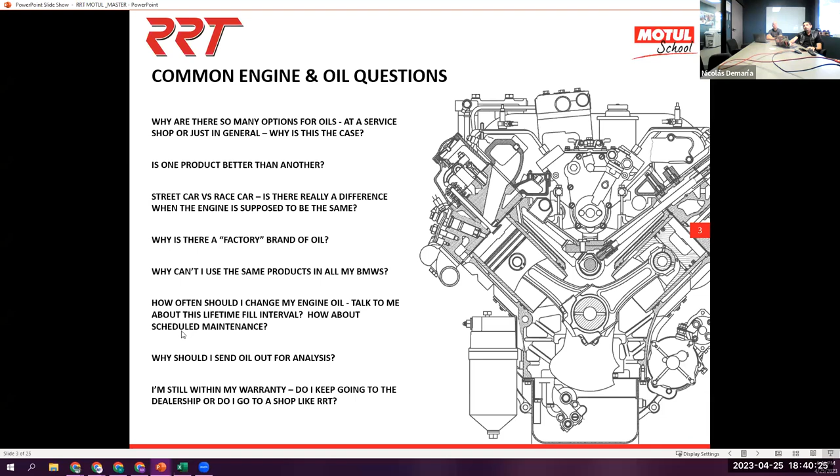First of all, we wanted to make a brief introduction about the Motul brand for folks that don't know about us. It may seem crazy, but it's one of the oldest standing brands in the world, started in 1853, and in the 1950s became a French-owned company. We are still a family-owned, independent company. We focus on blending lubricants and other maintenance chemistry, with no relationship to the fuel world. All we think about is lubrication and maintenance solutions.

Sometimes people ask us, hey, what's special about Motul? What did you guys do along your career that makes it so special? We do have some technical milestones that I could mention.

On the left you can see that we were the first ones to trade a multi-grade lubricant in the market for regular automotive applications, which was previously limited to aero and some defense applications. We were the first ones out there in 1966 to commercialize a semi-synthetic lubricant for cars. And one of the things we take most pride in is being the first company to develop a 100% synthetic ester-based lubricant for normal car and motorcycle applications, back in 1971. That was the birth of 300V, because back then we had 300 victories with the Motul-supported teams. Ever since then, everything to do with racing and engine oils for Motul has been 300V.

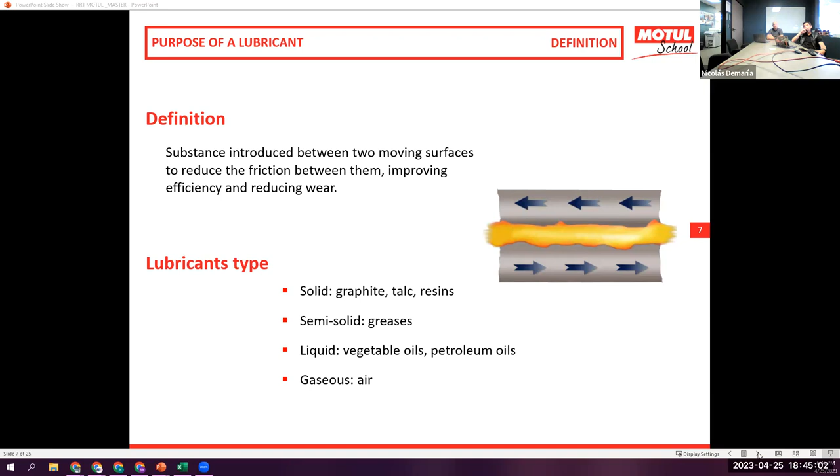We will see a brief overview of the different functions that an engine oil needs to perform inside the engine, some of which are becoming more and more important in recent years. First and foremost, reducing friction, minimizing mechanical losses and wear, and providing a film that's stable and consistent across the board, no matter the load state of the engine.

Mechanical losses are super important for us. This is how we make money with racing. Approximately 30% of what you put as fuel inside your car goes to waste in friction. That 30% of losses is divided among the many different components of the engine, especially the valve train, the piston cylinder interface, and the crankshaft. So the additives inside the oil, and the base oils we use for certain applications, are all targeting reducing that friction across those different components.

It's obvious for all of us that by lubricating and providing a stable film, we provide engine noise mitigation. We can't have parts slapping against each other with no control, especially in high-revving engines.

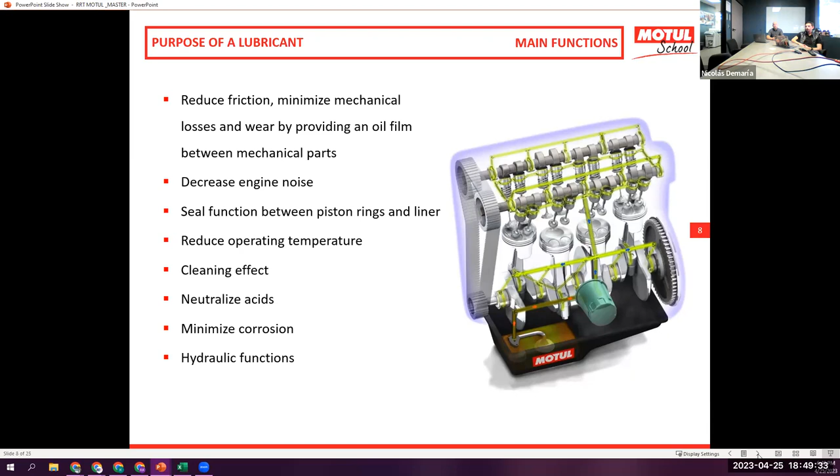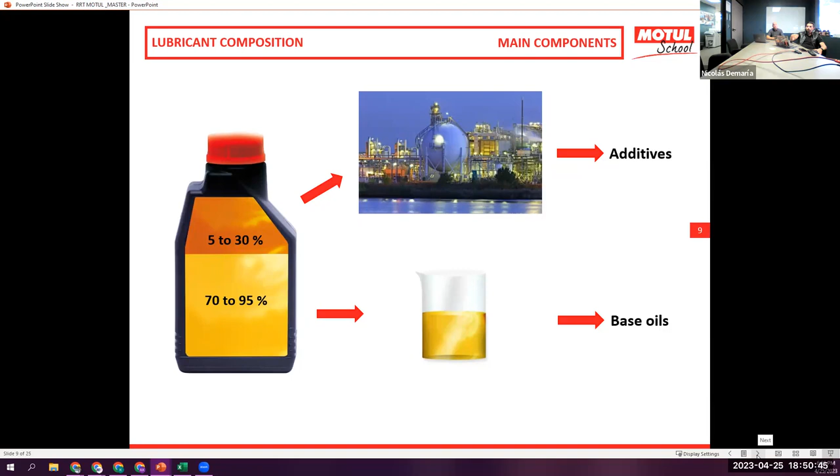As a rule of thumb, one can always say that simple hydraulics, as you would have in a hydraulic press or anything of that sort, don't carry that much additives. It's pretty much 95% base oil. But when it comes to more complex fluids, like certain engine oils, power sports engine oils, transmission fluids, then the additives weight in the formulation becomes higher and higher. The more complex the functions, the more additives we need to put into play for giving the oil certain specific characteristics, avoiding the oil to degrade, making the oil flow better, etc.

This is a brief overview of what you can see in our line and how we represent the different base oils and how we convey to the customer what application those oils have. So from left to right, you see the level of quality going up from the mineral products, which we barely carry in the States—there's hardly any demand for us in that market. But you can see the technosynthese line, which is a specific blending of mineral and synthetic oils, or sometimes of only synthetic oils. And you have your fully synthetics there, the 8100 products, which, depending on the naming, you can see an example from the X-cess.

We tell the customer what approvals these products meet. And obviously, as you can see on that 8100 X-cess, the higher we go in terms of quality, the more approvals the products carry. So the more multi-brand approved those oils become.

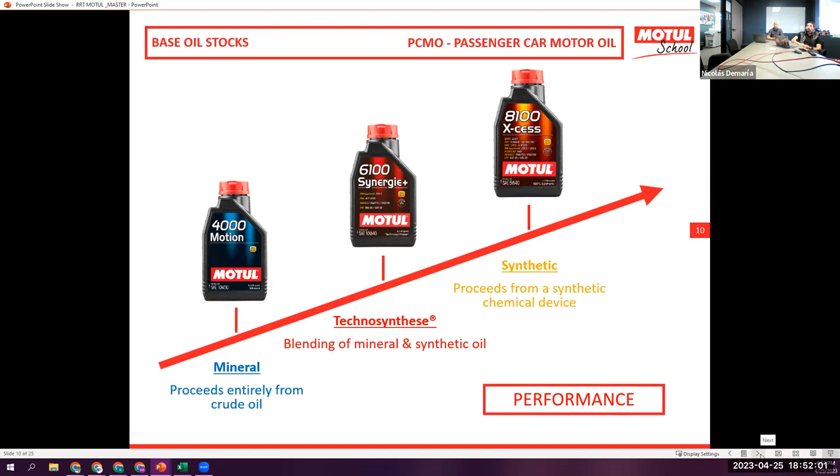Sometimes we cannot mix that many different profiles, but it's okay, Kelsey. That was the right picture. Thank you very much. We're very synced on timing.

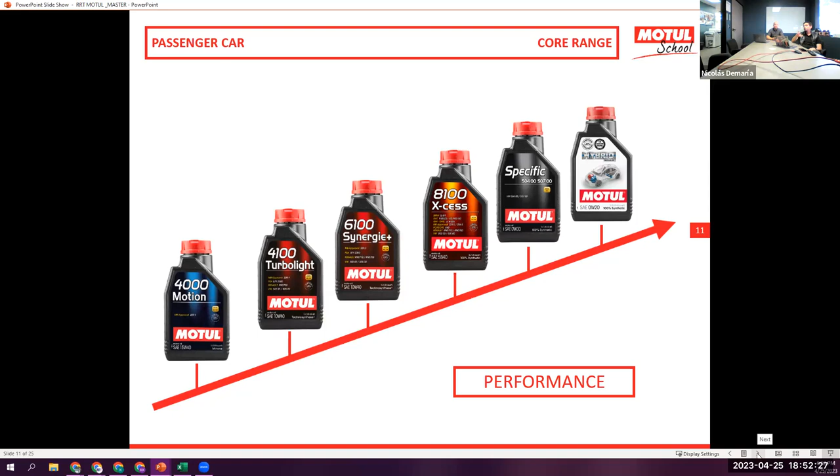Sometimes we cannot mix certain applications, or we have specific demands from certain customers, like big buying groups, certain dealer groups, and you will see some specifics. There's an example there from an Audi, Volkswagen type of product, but you will see afterwards that there are plenty of specifics for BMW as well.

Also very important, because we like to provide tools of the trade for every type of customer. We saw that there are plenty of Motul applications for service cars, but we also provide a broader range of viscosities and product profiles for racing as well.

Like I said a couple minutes ago, 300V is everything that has to do with racing in the Motul motor oil world. You see three very brief examples there, a 540, a 1550, and a 1060, but there are 12 different 300V products. The idea behind that is to give customers a viscosity that will match every single tune or prep type of architecture or calibration.

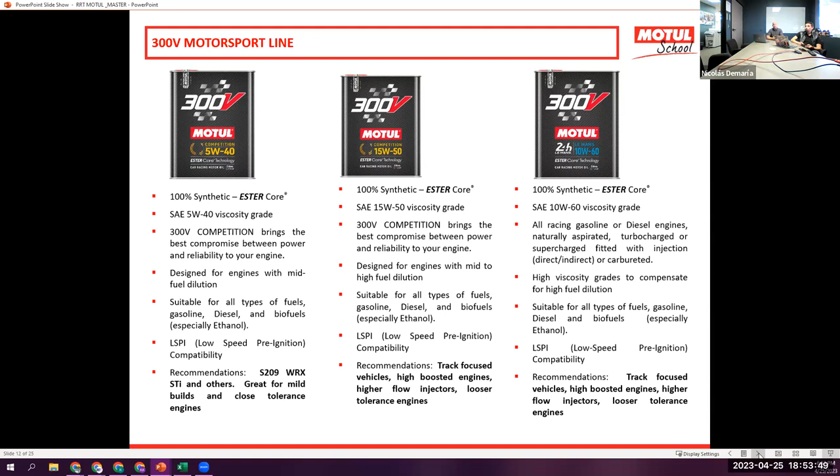So you can go from very, very low viscosity fluids, such as a 0W8, very aggressive, drawn towards qualifying or very, very short stretches of racing, up to a Motul 300V Le Mans 20W60, which is one of the most used products for endurance. The idea behind this is meeting every single tuner need.

Now, why are synthetics so good, and what makes the 300V a different type of animal? First and foremost, we need better thermal stability that will provide better oxidative stability. When I mean oxidation, I'm referring to the oil's degradation by high temperature and by certain contaminants. Synthetics are very, very superior in that respect versus regular minerals.

Also, when we're talking about high performance applications, we need to consider the better stability this chemistry has, providing a more stable film, fundamental when it comes to high revving engines, engines that are operating at high temperatures and sometimes with a lot of fuel dilution. You need that viscosity to remain constant.

Synthetics will obviously flow better as well at low temperatures, but when it comes to very harsh environments, when it comes to engines running sometimes at 1 degree Celsius in the morning, and along a stretch of race on a rally, they will hit 30, 34 Celsius during the day. You need to have that broader range of temperatures available from your oil.

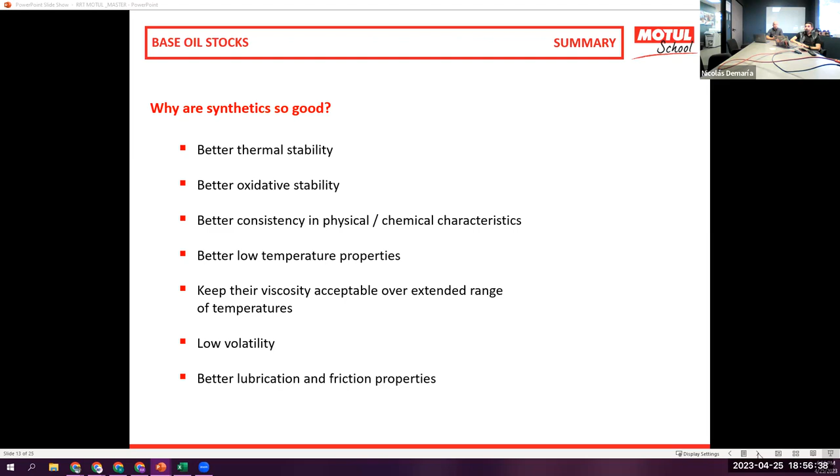Matt, I just seen your question regarding E10. Absolutely, these fluids have been tested with E85, E100, and in some markets with M85, which is 85% methanol. It's not very popular here, but just so you know, all of these 300V products are all biofuel compatible. They will emulsify water and biofuel contamination better than a regular oil, so you don't have to be worrying about that much of the competition of the fuel against the additives.

All right, what makes these oils different in a way? Here we're going to have a brief look at the OEM performance standards. And since it's a BMW forum, we're already going to concentrate on those. But I wanted to give you a couple words before we get on to the specific standards.

OEM standards, OEM approvals are fundamental for our market because an OEM, a series OEM, will deal with the lubricant as if it were an integral part of the engine's engineering. So whether it is that you want to keep your warranty, whether you're servicing this car at a dealership or doing your services yourself, Motul fluids will allow you to keep your warranty, which is very important. But for us, it's also important because it allows us to be directly in touch with the OEMs. It allows us recognition of the brand quality by these OEMs, no matter where you are in the world. These guys know that they can rely on having the same Motul product they see in Europe, here in the United States, in Paraguay or in Bolivia.

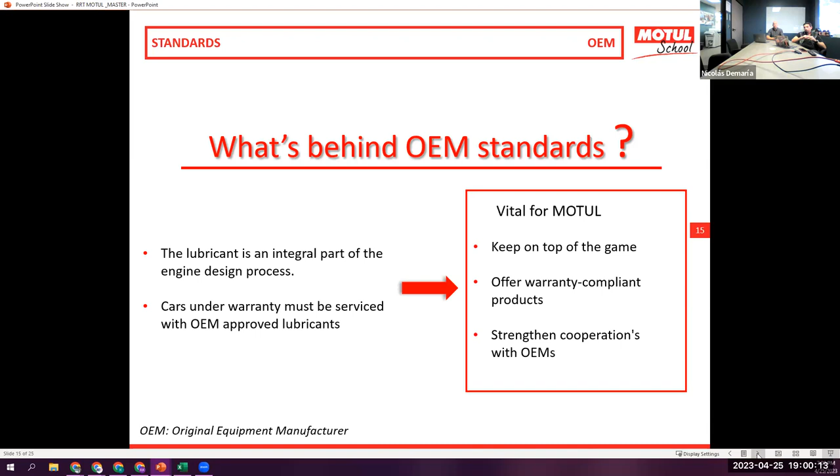If we go further onto the presentation, we will see there's some examples of different European manufacturers' approvals and American manufacturers. Obviously, Europeans tend to be more complicated on this front. So you will see that every different brand from the European auto industry has an approval system in place. So it's a pretty complex business. But when it comes to domestic, it's a bit more simple. Pretty much the only ones demanding a specific profile and doing specific tests on engine oils are Ford, General Motors, and Mopar. And then the domestic Asian market relies on API and ILSAC standards, so they try and keep it simple. But you have there two different examples of what America and Europe do regarding approvals.

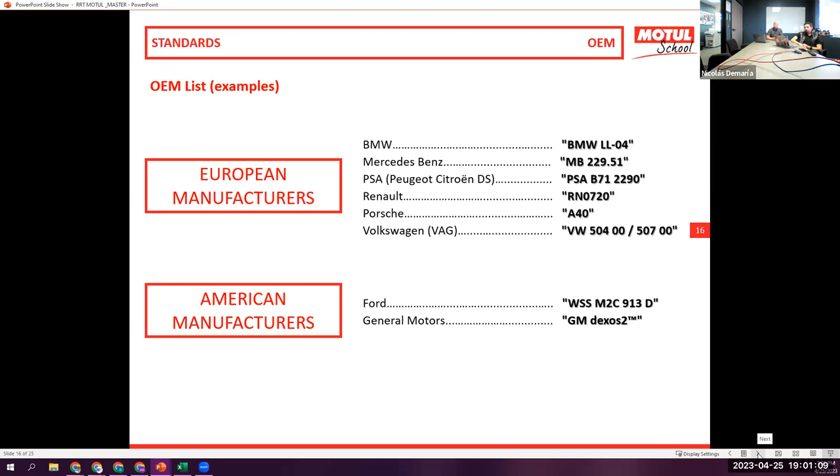In the next slides, you will see, if you don't know them, how BMW deals with their approvals. All of them are called LL, followed by a number and a suffix. LL means long life. The system of approval was born in 1998. Those were the first long life approvals coming out of BMW. And from there on, they identified the different standards with the year the specification was brought to life. Like I said, all of these specifications are based on different European profiles, and that's what you see to the right of your screen. Taking, for example, the BMW LL17 FE+, we're talking about an oil whose sole purpose is increasing fuel economy, and that's the reason why you see the FE, fuel economy, and the plus.

You can see there that it's an ACEA C5 profile, which means that this is a mid-SAPS, sorry, there is a bit of a typo there. It's a mid-SAPS profile with an ultra-low viscosity at high temperature and high shear. And that is the reason why with this type of fluid, you can save a lot of fuel versus a regular 5W40 or 10W40 oil. Do not be fooled into thinking, hey, this is low viscosity, this is probably not very safe for my engine. Why should I use their 0W30 or their 0W20 instead of the old 5W40 I was used to using? Well, the manufacturer has made sure that obviously the oil's chemistry, but also the components and the component topography, the surface quality are a complete match, and it's safe to use these low viscosity new oils.

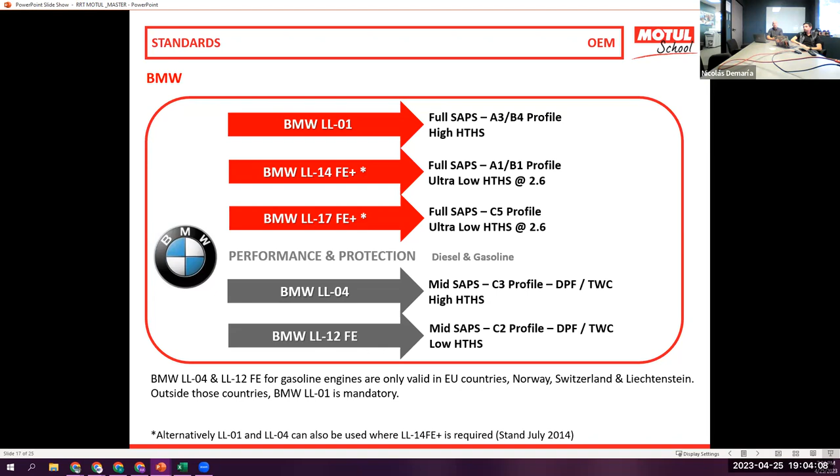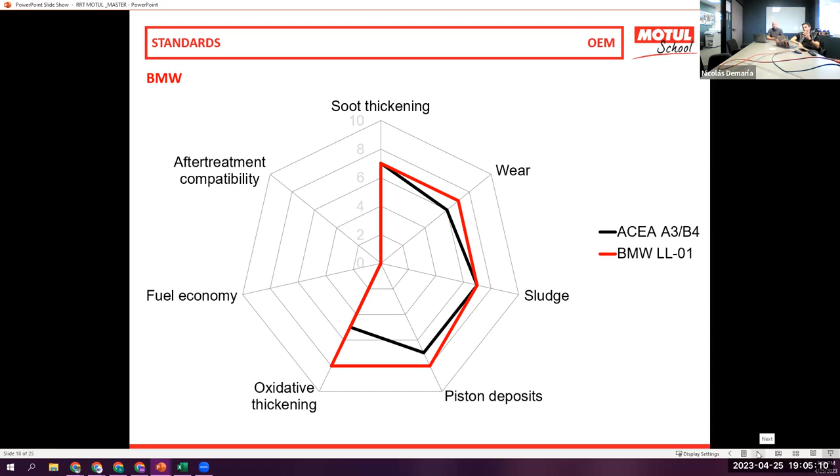This is a brief idea based on the typical LL01 standard for you to understand how these folks are trying to evaluate these different approvals. And as you can see there, it's a simple spider chart with 7 different properties. Obviously, there's very complicated tests behind this using hardware and some bench tests, but the idea is to qualify the oils based on a 0 to 10 scale on these 7 different properties. They are all targeting engine cleanliness and protection against wear, for sure, but they're also targeting fuel economy and aftertreatment systems compatibility, meaning DPFs, 2- and 3-way catalytic converters, and in the future, gasoline particulate filters. So what we had in the previous slide, sorry, was the LL01 approval.

And in this next slide, you will see the LL04, which was the example for a diesel heritage approval. You can see there that the diesel oil, being a mid-SAPS fluid, has a lot better after treatment compatibility, meaning it carries less metallic ashes, less phosphorus, and less zinc that are completely harmful for the after treatment systems. And also, those LL04 oils were a lot better at keeping track of the oxidative thickening, meaning the oil will not degrade as fast and will maintain a more homogeneous viscosity along the oil drain interval.

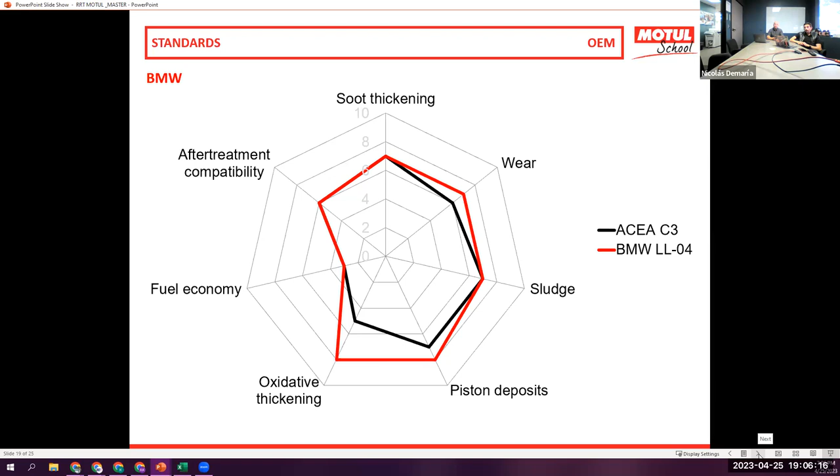They're better at cleaning, so better protection against piston deposits, slightly better protection against sludge, and they already had an advantage in fuel economy versus the old LL01. And if we would see the newer approvals like the LL17 FE, you would see that that area of protection is expanding more and more. So us lubricant blenders, we are always forced to move at the same pace as the OEM to keep track of what they need in terms of protection for their engines and provide that with the oil.

That's a little bit of the development process, how the lubricant blender and the original equipment manufacturer work in conjunction to provide the oils they need to meet the performance standards, the expectations of the customer, but at the same time, the emissions and the fuel economy criteria that the government imposes.

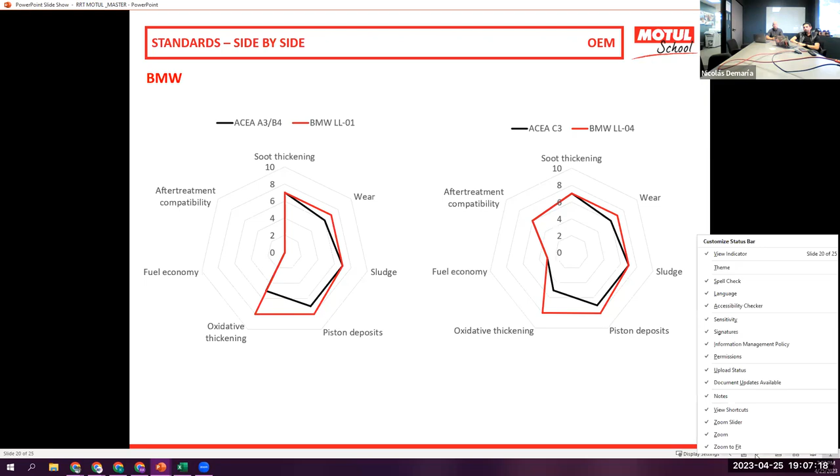We're at this point going to turn it over to RRT and chat through some of the questions and topics that come up in our wonderful world that we live in with oils. Some of the questions that come up are: what are the different types of oil? How do we apply those to our products and our vehicles? What's the difference between different vehicles? Why can't I just dump the same stuff in all my BMWs or my other cars? Just those technical questions that RRT is so good at answering. So I'm going to turn it over to RRT next, and we'll get going with their presentation on their slides.

Okay, so we know we threw a lot at you guys, a lot of the specifics and many of the grading discussions and things you may not remember. And the idea here is to help you have intelligent conversations when you go to talk to your vendor, when you go to pick out your product to use for your car, that you understand the concepts. And you don't have to remember everything. You don't have to pick everything out for yourself if you work with somebody that's there to help you for your specific application.

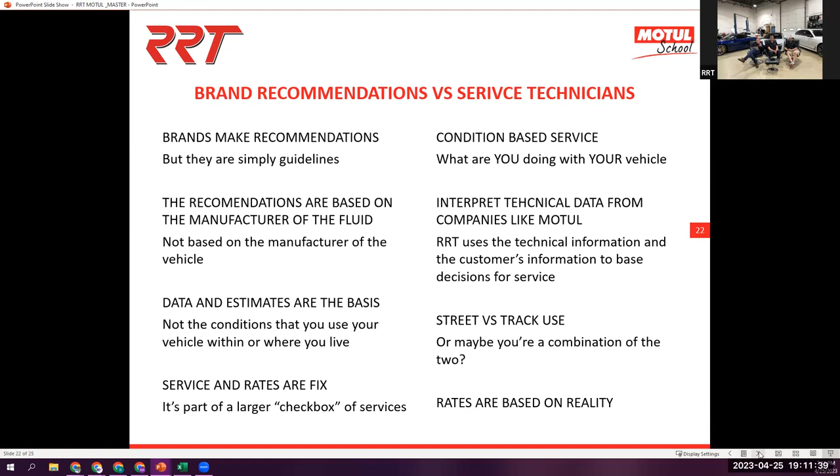So we picked four different engines to try to hit the full spectrum of our use cases here. So we're looking at a naturally aspirated V8, a turbocharged engine, which are being tracked more and more, have extremely high heat demands. That's one of the really big benefits we've seen of Motul over the years, is dropping the temperature on the turbocharged track cars significantly.

We've seen as much as like 15 Fahrenheit. Yeah. So bringing you from like the 250, 260 range to like, from limp mode to not limp mode. Yeah, couldn't be said better, right? Yeah, from ending your track session early, to keeping an eye on things, but being able to stay out for the whole session.

And then talking about the street and commuter car, we can't ignore that. I mean, the vast majority of what we do here is working on people's commuter cars, and that's where we spend our miles, out there in the commuter cars. And we want those to last as long as possible and not be replacing components on them. We want to be focusing on the maintenance, not the service and repair function of those.

And lastly, the tow vehicles. A lot of people use those not just to get to the track, but in daily use. So we'll be looking at a high output diesel on that tow vehicle.

So respecting the time, Kelsy, did you want to jump back in on your end? I'm just checking chat. I don't see, we've just had the one question that came through there.

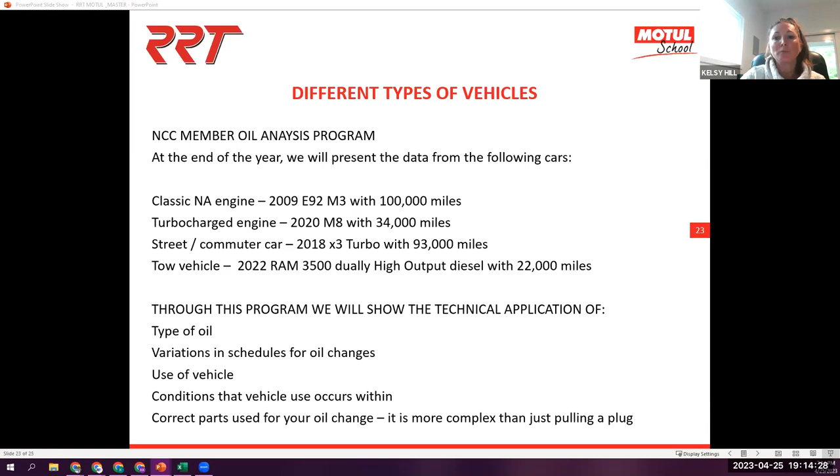Yeah, I'm just trying to understand the question. Which oil are these cars using? I think that was for the oil program. Yeah. Go ahead.

Yeah, so I kind of missed that these cars right now are not using Motul products. So we are going to do an oil pull, an oil change on these, run some data on them, and then we're going to run them again post Motul oil change and see what kind of information we can find there. We do have a little bit of a different oil analysis approach we'll be sharing with you guys later. So I'd like to get some good information from that when we do run that analysis.

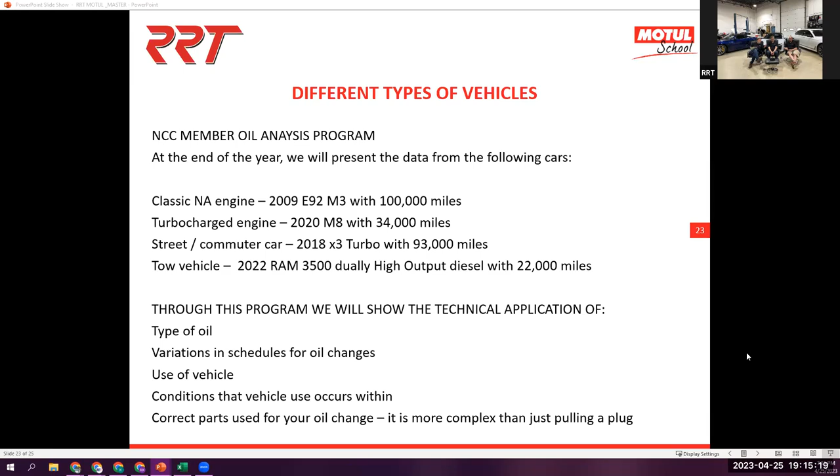Does anybody have any other direct questions while we have Motul on the line here? They're a good resource. It's not always that we have the provider here that works on the cars and the vendor at the same time, or not the vendor, but the actual producer.

So on the gear oil, we're going to be looking at that later on in the year. Because there is so much complexity and questions on the motor oil itself, we're separating out the other lubricants. So as far as gear and brake fluid, we're going to have a session with Motul on that specifically, because brake fluid is definitely not straightforward as well. There are pros and cons for sure on the brake fluid. Yeah. And you need to know what you're getting into on the brake fluid.

So yeah, thank you, Nicholas. Yeah. So without getting into that, that's going to have its own session. So Nicholas, can you answer that question there? If you want to come off mute.

Yes, absolutely. No problems mixing oil Y with oil Z or with oil X. Just make sure that both oils have at least the same API, ACEA, or BMW standard to avoid contaminating one with the other. But any reputable oil for a car shouldn't have any issues mixing them up.